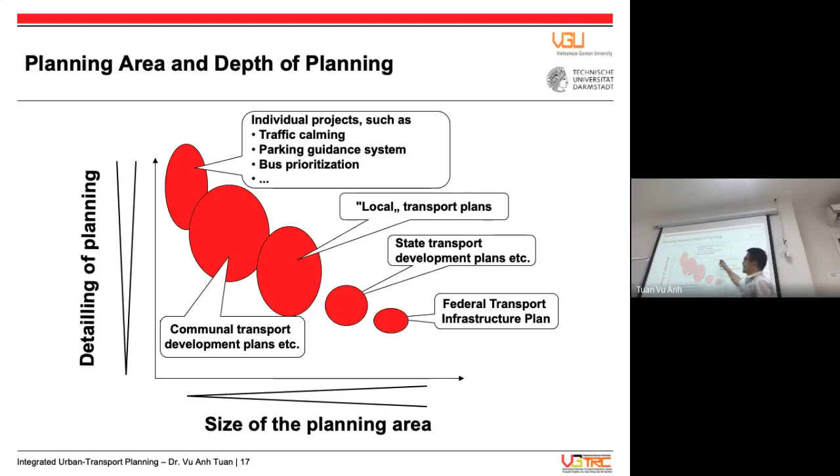So in transport planning, we need to do study, collecting data, analyzing, projecting, and suggesting something - especially infrastructure suggestion, policy suggestion, and other suggestions as well.

As I explained, for wider areas of study, we can have national or provincial transport planning, which focuses on planning for a large jurisdiction implemented by some transport agency, like the Ministry of Transport or the Department of Transport of Ho Chi Minh City. It is usually at the strategic level, and the planning is made for a long range, usually the next 20 or 40 years, so we need to look into the future.

How to project the future is really a challenging task. Usually we collect data from the past - let's say the past 10 years - how population is growing, how land use is changing over the past 10 years, how vehicles are growing over the past 10 years, and we project for the next 10 years. That is projecting as a trend. But usually vehicle growth is not linear like this; it's something like a logistic curve.

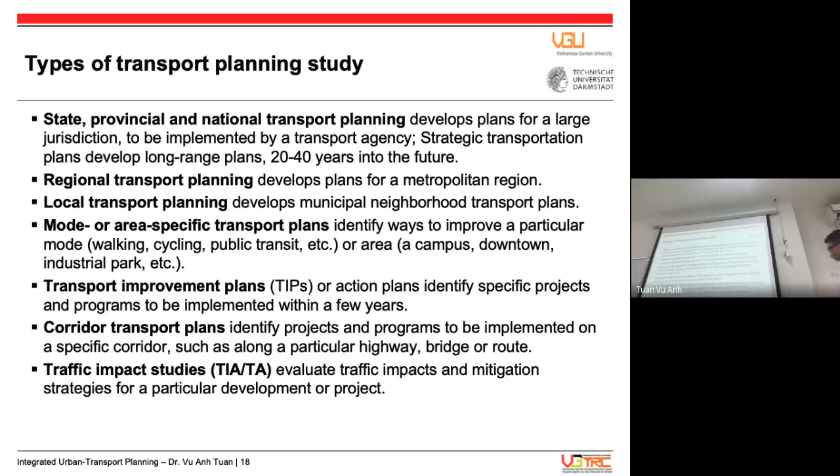So I already explained the concept of transport planning, and the characteristics of transport planning, and different studies at different levels.

Now I'm talking about conventional, or traditional, transport planning practice. As I mentioned, traditional transport planning is in favor of the automobile. It always thinks about reducing congestion by widening the road, and pays less attention to public transport, non-motorized transport, and the environmental issue.

So the key principle of conventional planning is to maximize traffic speed, minimize congestion, and reduce distance-based crash rate. Usually it comes up with road expansion. And of course, in conventional transport planning, the transport planner uses a well-developed set of engineering, modeling, and financing tools.

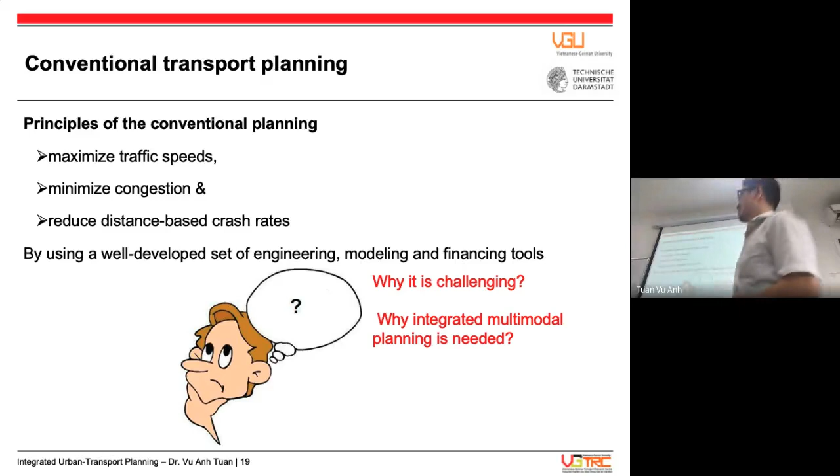Okay, so what is the problem with conventional planning practice?

As I mentioned, it supports automobile dependency, which refers to transport and land use patterns favoring automobile travel over other transportation options. Usually what they consider is how much is the financial cost to the government if government is going to build new highway networks, expanding the highway network.

How much vehicle operating cost can be reduced through saving fuel, reducing toll, and reducing tire wear. And how much travel time can be minimized?

If the new road is built, the commuting time from home to work may be reduced from one hour to 40 minutes. We can aggregate this for the whole population under the study area. And per-mile crash risk, as I already explained...

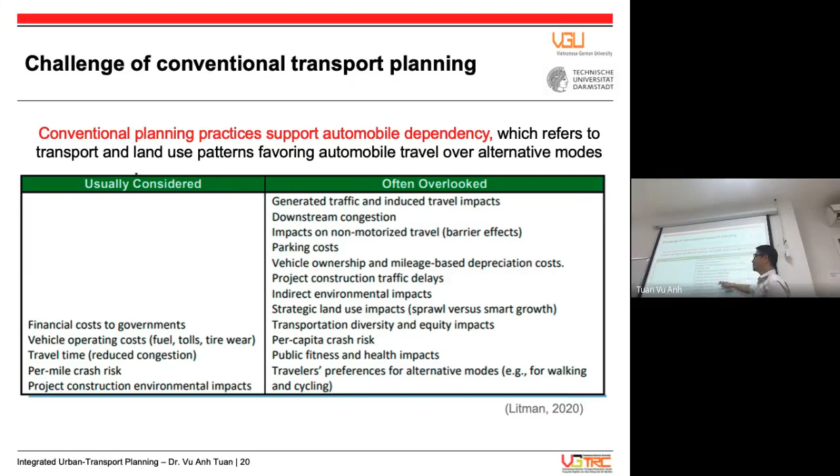But as I mentioned, as urbanization takes place rapidly, congestion becomes more severe, environmental issues become more severe, accidents become more severe, noise becomes more severe, and especially local pollutants like PM2.5, particulate matter. It's microfine dust. You never see it, it's clear. It looks clean, but actually it's not clean at all.

It's very, very dusty and very dangerous because every day you inhale about 10 to 12 cubic meters of air. And within it, many harmful gases and dust are emitted by cars, by motorcycles, and by other activities like construction.

So we have to solve all these challenges to make sure that we move around the city in a safer manner, in a greener manner, a reliable manner, and saving energy. And we will not sacrifice the needs of our young generation.

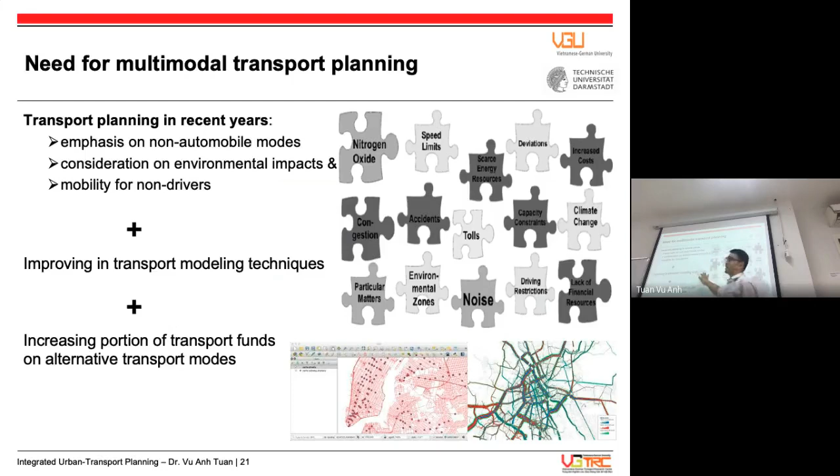We need to focus on multimodal mobility, not only single mode mobility. Multimodal mobility means two or more different modes are used for a single trip, between which the traveler has to make a transfer. So going from home to work by car is a single mode.

Or going by bus service only - we walk to the bus stop, then from the last bus stop back to office. This is also single mode mobility. But if first we walk to a bus stop, take the bus to the railway station, transfer from bus to train, and at the last train station walk to the office - this is called multimodal, because the traveler has to use two modes: first bus, then train or metro.

So what does it mean in terms of distance, time, or cost? In case of single mode mobility, here is a car - directly from the starting to the ending point, right?

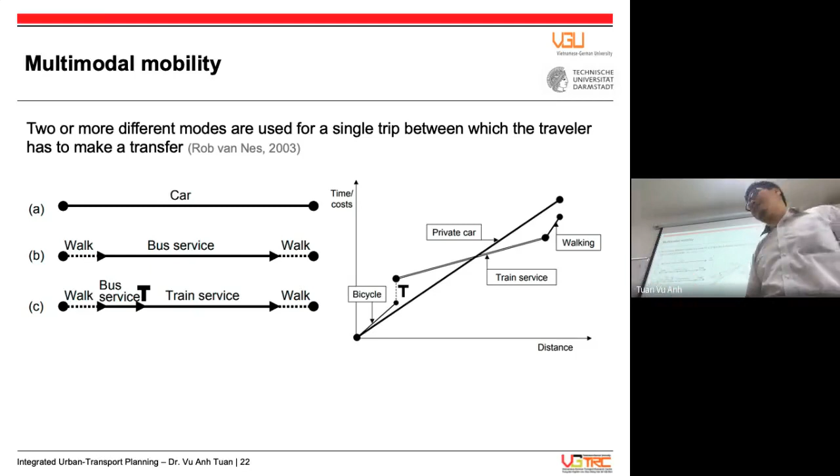Now, when we talk about multimodal mobility, in order to offer a multimodal mobility service, we have to make planning. Multimodal planning refers to planning that considers the various modes, including walking, cycling, automobile, public transport, and so on, and the connection among those modes. That is multimodal planning.

But multimodal without good connection, without good integration, is not good. It cannot attract people to use it. As I mentioned, if there is no parking for bicycles at the railway station, people are not willing to ride a bicycle to the railway station, right? So we have to make an integration between both.

So integrated multimodal transport planning refers to transport and land use planning that considers diverse transport options, including walking, cycling, public transit, automobile, and accounts for land use factors that affect accessibility. This is important - accessibility and land use factors need to be accounted for, need to be considered.

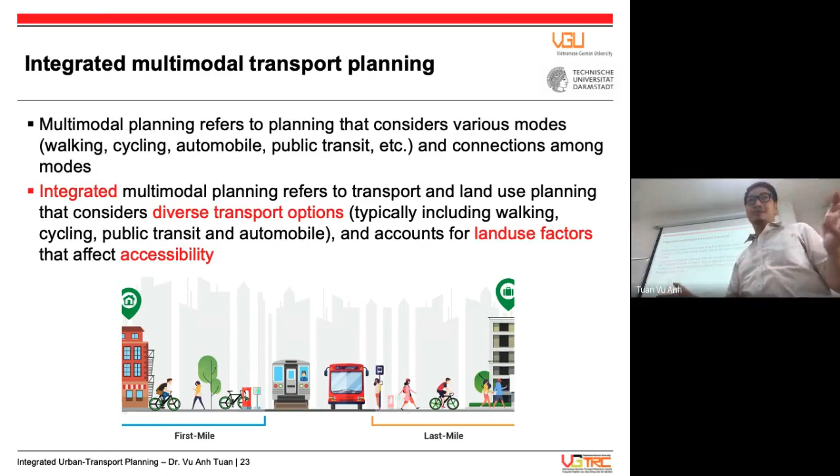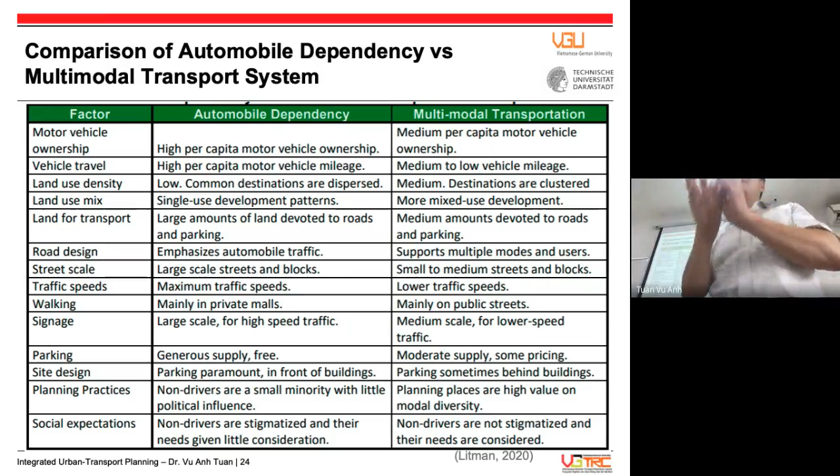And what else is important, but different? Social expectation. In the automobile dependency case, non-drivers like pedestrians and cyclists are stigmatized. That means no attention or very little attention. Planners say something about improving conditions for them, but actually it doesn't happen. But in this case, non-drivers are not stigmatized. That means they are significantly considered, and that consideration is increasing over time.

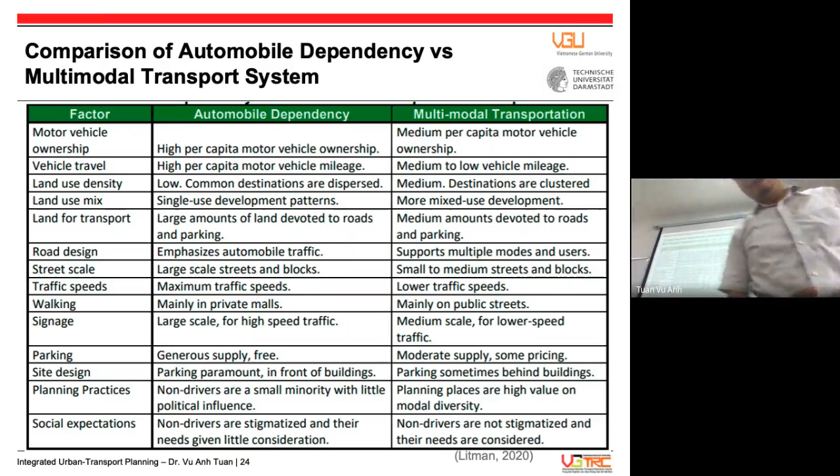What do you think is the benefit of integrating different modes of transport? First, we can enhance the efficiency of the transport system. Imagine we have an existing bus network, but the walking condition is very poor. So the ridership, the number of passengers, is low because people hesitate to use the bus when walking to it is so awful. But once we improve the walking condition and provide park and ride for bicycles, more and more people use the bus. That means we can increase the efficiency of the existing bus system.

People walk more and become stronger, healthier. This problem will become smaller. Therefore we can reduce road congestion, we can reduce air pollution, and we can improve affordability for low-income users. Low-income users don't need to spend a lot of money or save up to buy a car. They can use transit at low cost.

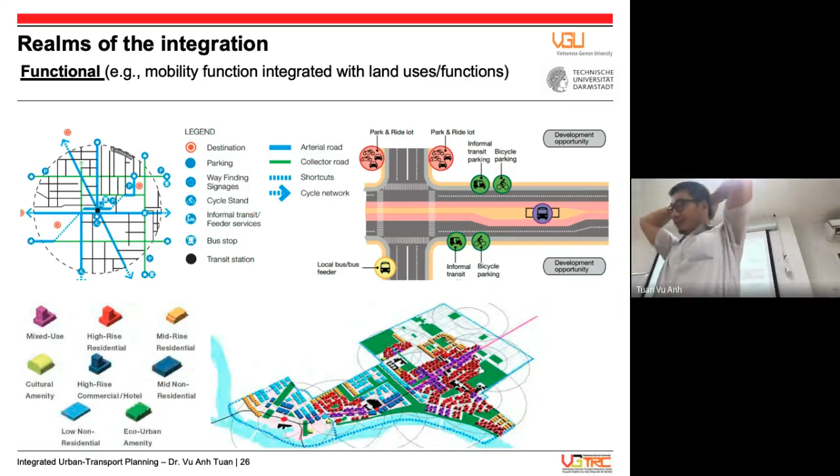Where we get on the train is also where we can do banking, where we can draw money. Where we get on the train, we can do shopping because a supermarket is located inside the station. Where we get on the train, we can have a restaurant, have dinner with friends, have a coffee with friends because Starbucks and Highlands Coffee are located there. And where we get off the train is also where we meet each other for business or for scientific conferences, because some conference hall is located just next to the railway station. That means we mix different functions, mobility function and land use function, together at one place, one destination.

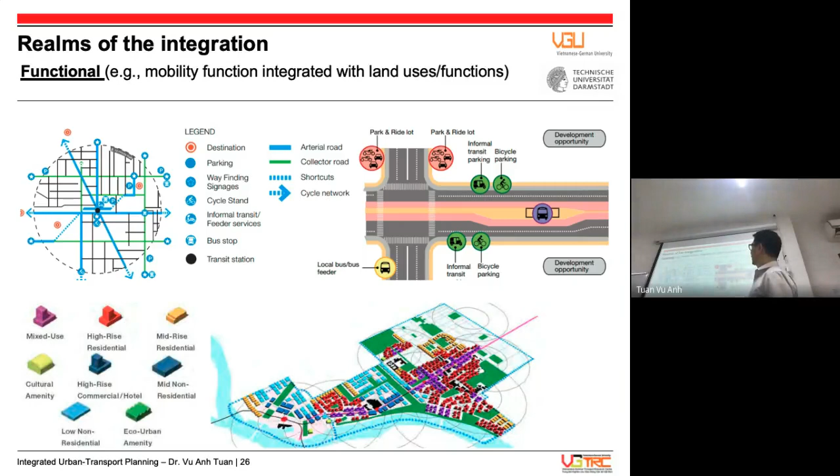Okay, this is the road, this is the intersection. Here is the bus stop, here we have the park and ride lot, here we have informal transit parking, and we have bicycle parking and so on. So that means we can integrate different modes at one place. This is simple, but this is really integration between land use function and mobility function.

This is showing the station development area. Here is the station, and after getting off at the station, you can go to housing, to a sports spot or stadium or park, and others, very quickly and easily.

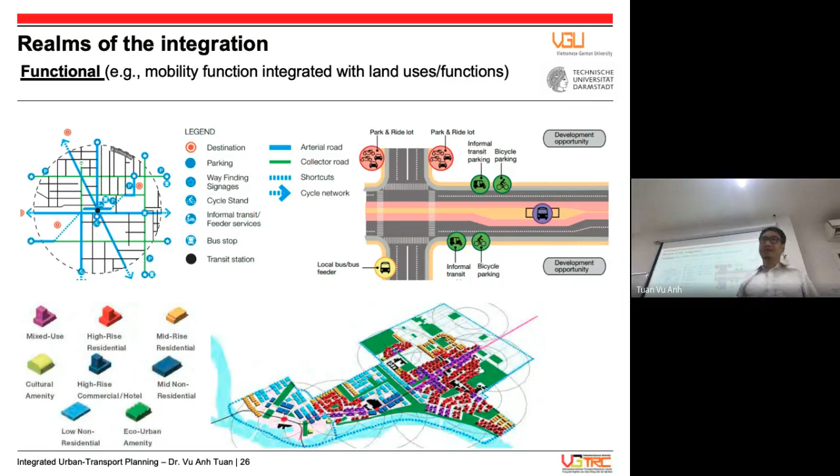Now, after the functional integration, we should have the physical integration. That means network integration: integration between the bus network and the railway network, integration between the bicycle network and the bus network. So this means smaller, hard infrastructure integration, which allows for easy access and interchange between different modes, such as building stations that service multiple types of transport.

Like here, this is an airport. Right after the airport, inside it, we have the bus station, and we have the car park. So after getting off the airplane and checking out, you can ride a bus home or to your final destination. And here at the train station, you can have the bus stop station. That means after getting off the train, you can get on the bus, or after getting off the bus, you can get on the train immediately.

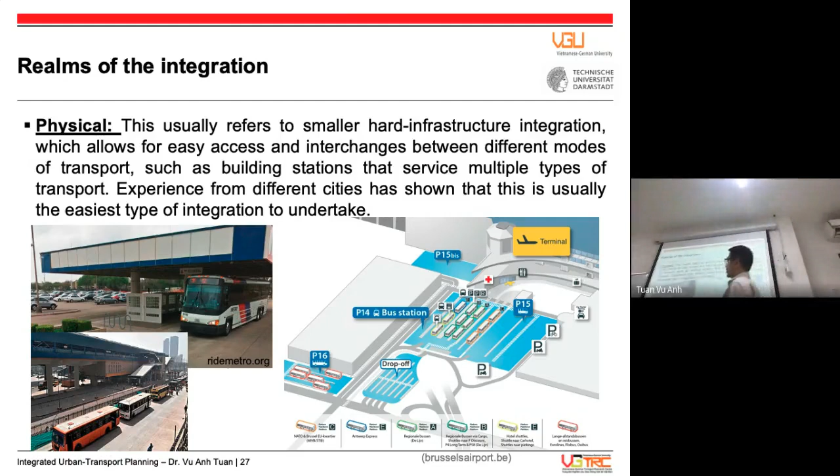And this integration is usually easy to take place because it's just an engineering issue.

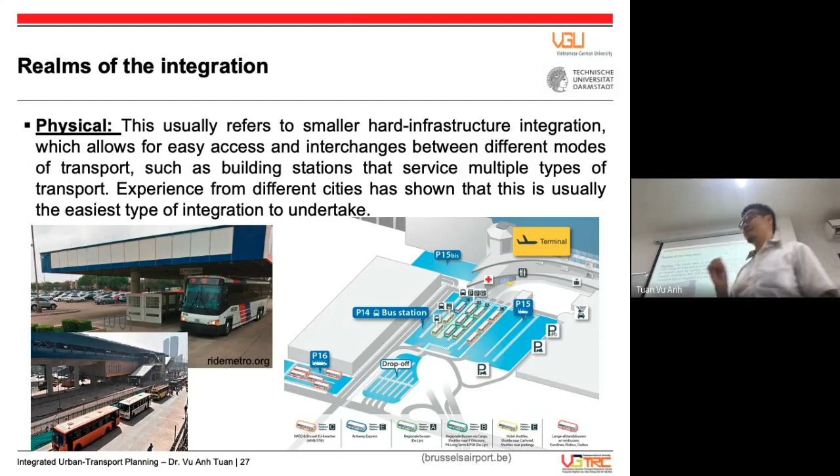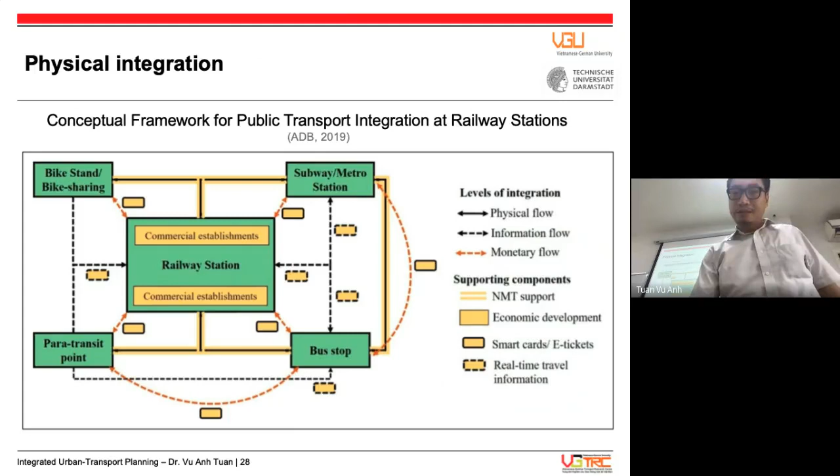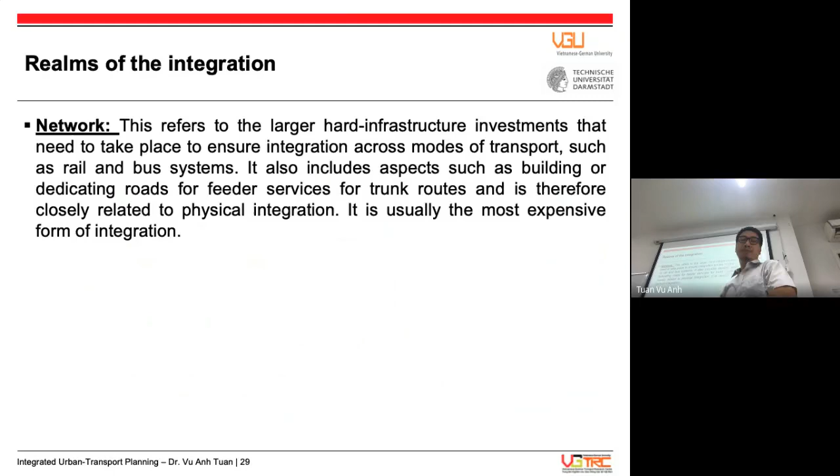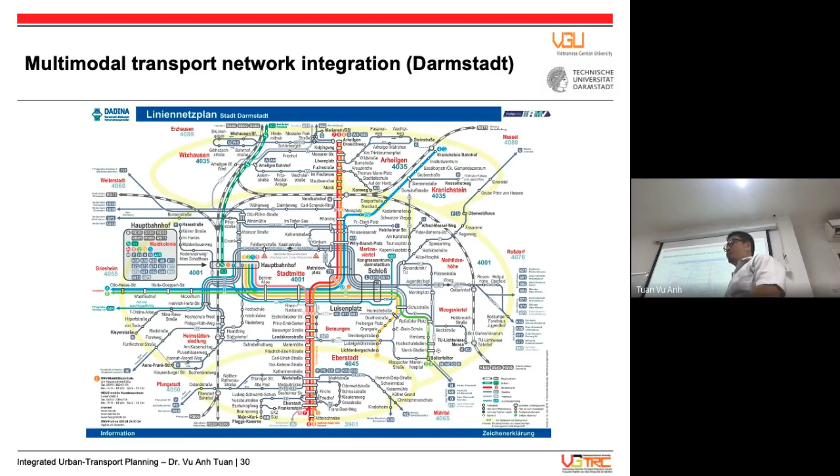And now, not only integration at the node or station, but integration in terms of network. Here is a Darmstadt railway network with tram and buses. The tram and railway act as a backbone, and the buses supply, complementing and making a really dense network, allowing people to access the transit station everywhere within 200 meters walking. They can get to the bus stop, train station, or tram station. That is very convenient.

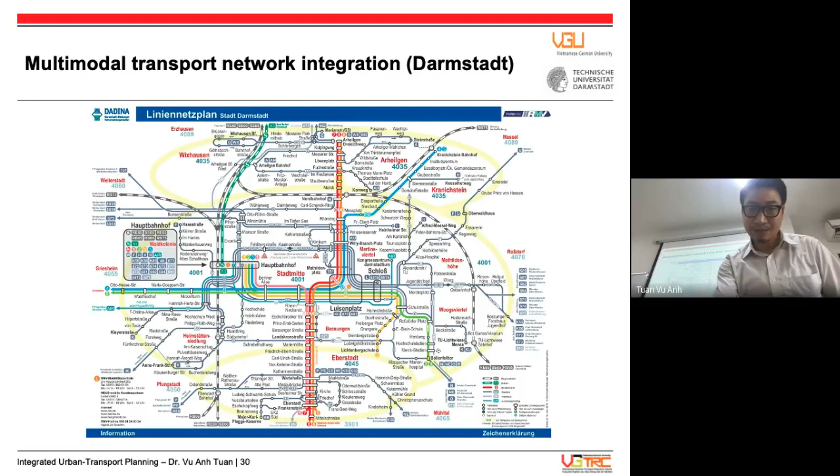Next, not only physical integration and network integration, but also operation integration. Operation integration usually refers to integration of the ticketing system, using the same common ticket for train, bus, tram, or even bicycle sharing. Integration also in terms of the timetable, allowing passengers to transfer from one system to another quicker.

I remember when I stayed in Tokyo, I would get off one train and get into another train within just 20 seconds. The train arrives, stops, I get off, and at the other platform nearby, the other train is already arriving, so I get on within 20 seconds. If it's longer, I may miss the train. That means the railway operator has to synchronize the timetable of different train lines. I even have to choose which car to stand in—middle, beginning, or end—because that determines whether I can catch the next train.

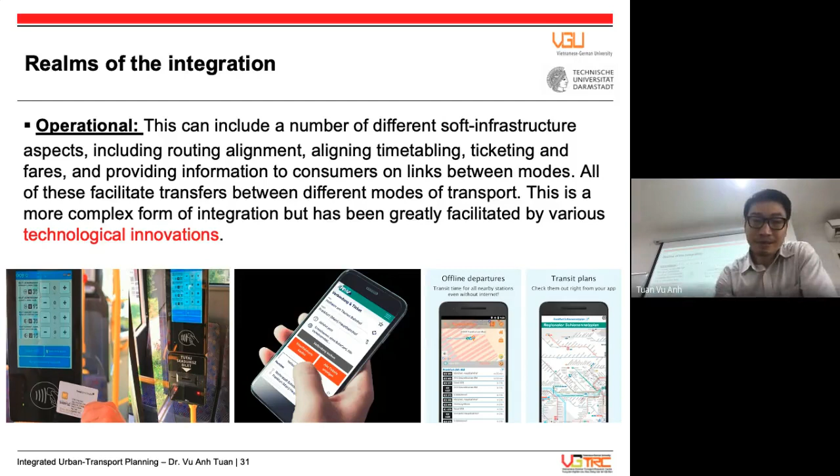But it's simple for the user, while not simple for the provider—very complicated. A lot of the time it's institutional integration, and it may take years and years, or never happen. But this is most critical.

If the train operator and the bus operator don't shake hands, there's no integration. If urban planning and architecture department and transport department don't shake hands, land use and transport integration never happens.

Whatever the good ideas, if key stakeholders don't work together or integrate, the ideas stay just ideas. As I mentioned, in terms of planning or any technical sector, we have different stakeholders in the planning and even management process. National government regulates through law and regulation. Regional and local government have specific policy, rules and regulation. Public service providers like bus operators and train operators, and private service providers like businesses, have to consider their business model. Citizens, customers and users have their own preferences, norms, attitudes and habits.